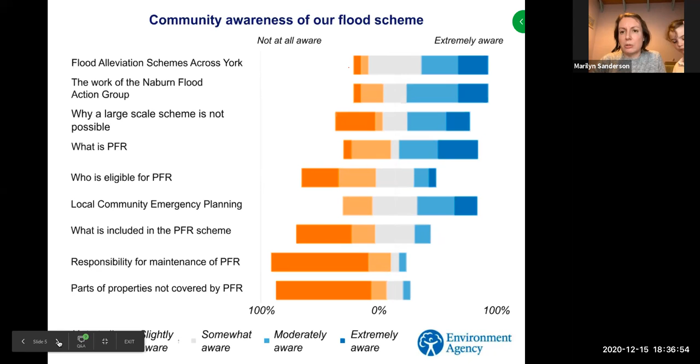so we're looking towards answering questions on PFR, what's included in the PFR scheme and what's not included, and then where the responsibility for maintenance of your measures lies once they have been installed. We've also got eligibility for PFR, so there are slides covering those questions. Obviously, any questions that you don't feel are being addressed, please just pop them into the Slido and we'll get to them as well. So our priorities, what you asked us to prioritise.

So top of the list there, we've got why Naburn is not getting a large scale scheme. And as I already mentioned, we're going to be going through some of the challenges that we've got in Naburn and why, unfortunately, we are unable to deliver a scheme here. The impact on roads and access, also of a high priority. And again, what is it that PFR can do for you. So like I say, we have got some slides on these, but anything you don't feel is being addressed, please just pop the questions in the Slido.

So straight into our process then. So I've summarised it here into the four key steps, which is simplifying it a little bit, but it's just to give a broad understanding. So it starts with the options appraisal reports. So there's been a series of these in Naburn. Pop to the next slide.

So the process of this, we have our specialists, so we employ contractors and it's AECOM who've designed these reports for us. And the purpose of the report is to give detailed assessment of the means by which floodwater enters properties. So is it coming from the river? Is it coming up through the drains? Is it coming from any tributaries that are going into the main river? And what options are best to try and manage those flood mechanisms. So a number of possible options are usually identified, covering a wide range of possible options, and these are shortlisted so we can appraise them further.

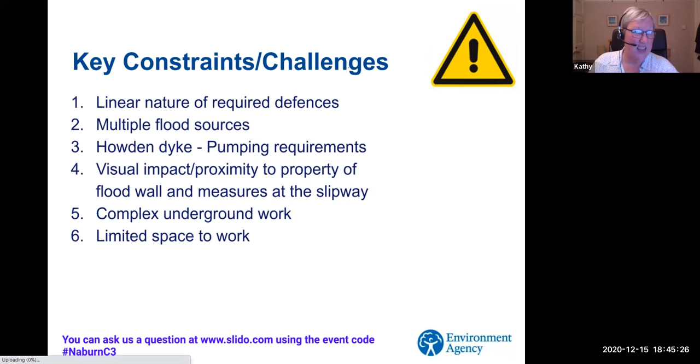You can get floodwater ending up being trapped behind a defence if the defence line has not been constructed and considered appropriately with the same level of defence across the whole length. Any chain, of course, is only as strong as its weakest link. So any options that we progress need to show that all significant flood sources are either dealt with by the scheme or can be mitigated by additional arrangements, for example, temporary pumping.

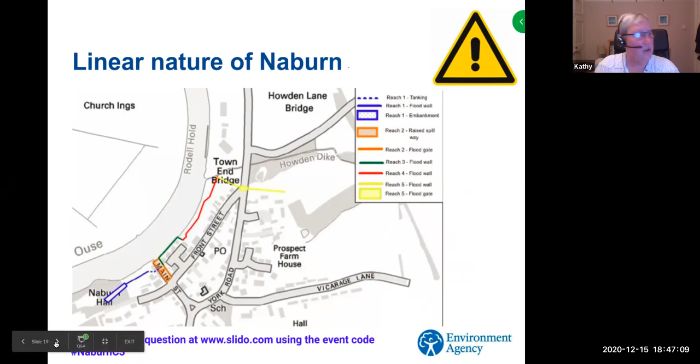Thank you. So looking at the various sources of flooding, as I mentioned before, any flood scheme must look to address all significant flooding. So in Naburn, as well as the primary challenge of the River Ouse itself, we have the route that the Ouse can take through Howden Dyke into the village. There is the flow in Howden Dyke itself, which needs to be addressed. The impact of any localised rainfall in the area on the local surface water system, and any field drainage which feeds into those systems as well from the areas to the east.

You will also notice that there is a significant area within the centre of the village where the low-lying nature of the land shows that there is an increased risk there of surface water getting onto the surface, settling and pooling. And I think anyone who lives in the village is quite familiar with that particular problem there.

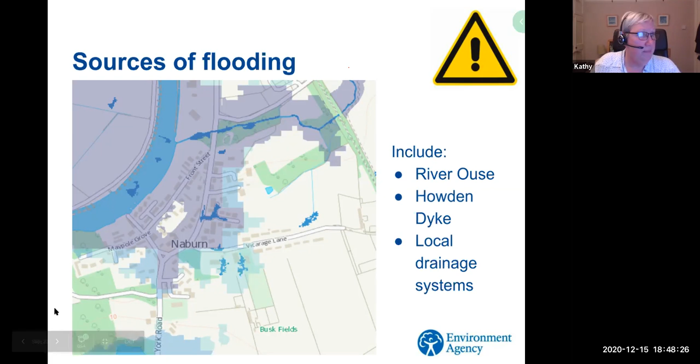So looking at Howden Dyke and the challenge that poses with regard to overpumping, permanent pumping arrangements are prohibitively expensive. Permanent pumping stations cost upwards of £1 million to put in place, and then have ongoing challenges with replacement, maintenance and operation, all of which have to be factored in to the whole of life costs of a scheme.

Temporary pumping arrangements are also expensive and resource intensive. And when we are in an emergency response mode in York, the provision of any pump cannot actually be assured at any time.

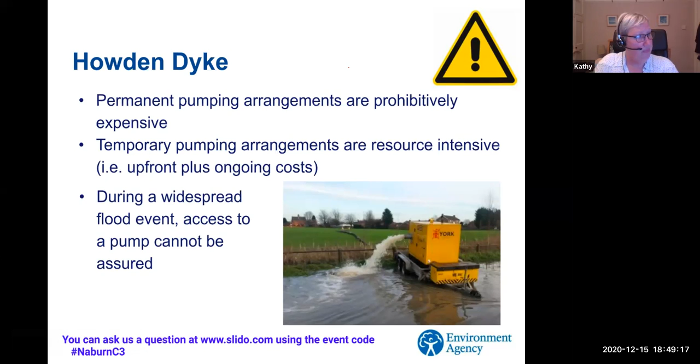So moving on to visual impact. This is something we do need to take into account, the impact on the natural and human environment of anything that we wish to see. In Naburn, the proximity of our interventions, our measures, our structures to the village itself, to individual private properties, and the challenge of those structures significantly changing the nature of the centre of the village, the views out onto the river, onto the washlands on the other side of the river - that risk is actually quite high.

So there's a risk of blocking access to the river for residents, as I think this drawing shows, which gives a potential impact in just one of the many reaches that we're considering - so the visual impact and the access impacts to the river for residents.

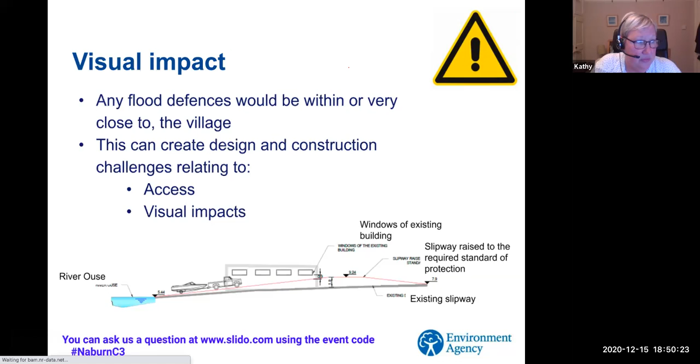So when river levels are up, water pressure obviously is increased, and that can cause seepage underneath the flood walls. So a little bit like an iceberg, any flood wall protection that you might see around York will have considerable work underground to ensure that seepage is cut off. These are most often provided by sheet piling, which is driven underneath flood walls, or sometimes we use grouting underground to cut off any seepage coming through, which would undermine the protection line, the defence line, if you like.

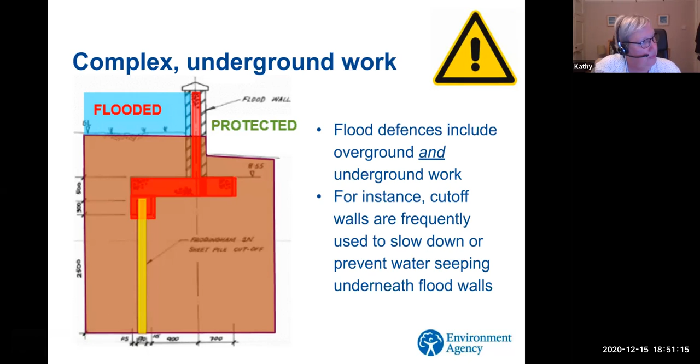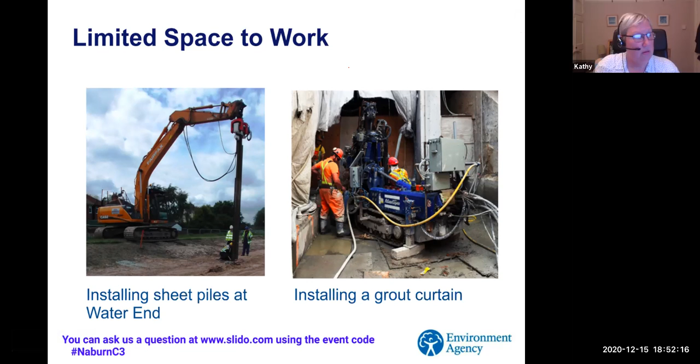Another challenge linked to that, but not exclusively to do with our underground working, is the limited space to work. In order to provide a traditional flood wall cut-off right at the river's edge, the size of the flood wall would have to be much higher than further away. But in either case, we would have limited working space, and it's most likely that for some of the reaches, that work would have to be done from the river itself. The costs and risk to the delivery of the project in the long run, because of the risk of flooding when you're working from the river, again all add to the cost side of the equation and undermine our ability to hit that magic cost-benefit ratio of 1.

We are obviously aware of the impact on access roads. However, government spending rules for flood risk schemes are very heavily weighted for the benefits of protecting homes against flooding, those damages avoided. So there are limited benefits available for protecting or improving access. It is quite challenging to justify schemes where the costs involved are really based mainly on improved access.

So having gone through those challenges that have been taken into account as part of the assessment process, despite our best efforts over a number of years, we have been unable to find a capital scheme that is affordable by some considerable margin. We are, however, committed to provide what flood protection we can to all those at risk, and therefore the solution for Naburn is the Property Flood Resilience Scheme. So I will hand back to Marilyn now, who will take you through what PFR, as the acronym is, can mean for Naburn.

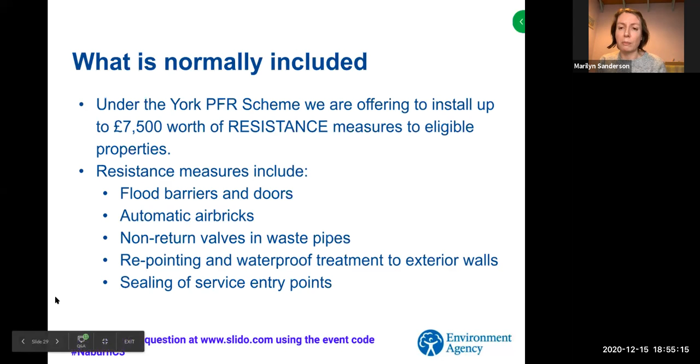In addition to these measures that stop water coming in, we do install pumps. From earlier pilot schemes across the UK, the PFR has found that installing a pump is the best way to manage and mitigate any seepage that can overcome the barriers and doors we've got, or any groundwater or subfloor flooding. There are two types of pumps: a puddle pump, which is a portable pump you would just put where it is needed, generally used for hard flooring such as concrete floors, or a permanently installed sump pump, which is for suspended timber flooring and goes in your subfloor void to pump out any groundwater or seepage that gets under the floor.

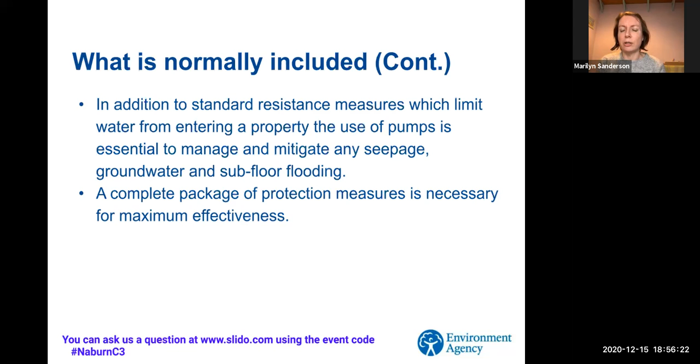A complete package of protection measures is necessary for maximum effectiveness. So we would be looking at the property as a whole and offering protection for the entire property, i.e. not leaving a gap or a route for water to be able to get in. So normally included, these are some of the examples.

So you've got a door in picture A and a barrier in picture B. So it's either or, although at least one entry point to your property must be protected by a barrier, so that if you are surrounded by floodwater, you are at least still able to get in and out without breaking that protection that you've got.

We've got the automatic air bricks, which look just like ordinary air bricks, but they've got the function inside to prevent floodwater from getting into your cavity walls. And then the black circle with the square next to it, so the pump, it's a sump pump. So essentially it's installed in a chamber in the subfloor void, and then there'll be an outlet pipe which will extract that water that gets in there.

And these can be internal if needs be, if that's the best place for them. Most likely and most popular is to put them outside your property with a pipe that goes into that subfloor, so it pumps the water out and then it's extracted away from your property.

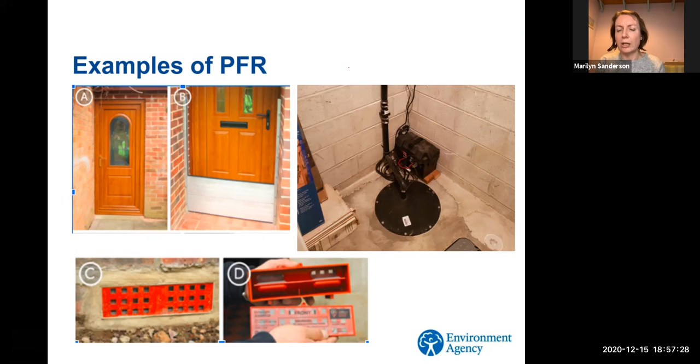What we're not including, or what is not normally included in PFR: gardens, garages, outbuildings are typically excluded from the scheme unless there is a direct flow route from that, for example, an adjoining garage. If there's no way of protecting the property without encompassing the garage itself, then we would look at best ways of doing that. But otherwise, the garage wouldn't ordinarily be eligible for measures.

Floodgates, again, because ordinarily floodgates are protecting gardens. They are not normally included unless there are extenuating circumstances or homeowners are wishing to pay for them themselves, essentially.

And resilience measures. So examples of resilience measures are where you could raise electrics or put hard flooring in. Concrete floors are more resilient to flooding than your timber flooring. These are not included in our scheme, and typically these sort of measures would be in excess of £30,000 per property. To enable us to protect as many properties as possible, our scheme is very limited to resistance only.

Eligibility then. So homes and businesses that are at risk of flooding from the main river. So in case of Naburn, the River Ouse, and in addition, any properties that have flooded in the past whilst the river was in flood. So this includes properties that were flooded potentially as a direct result of Howden Dyke, for example, or surface water being backed up because the river is in flood. So if you're flooded at the time when the river was in flood itself, then you're eligible for PFR.

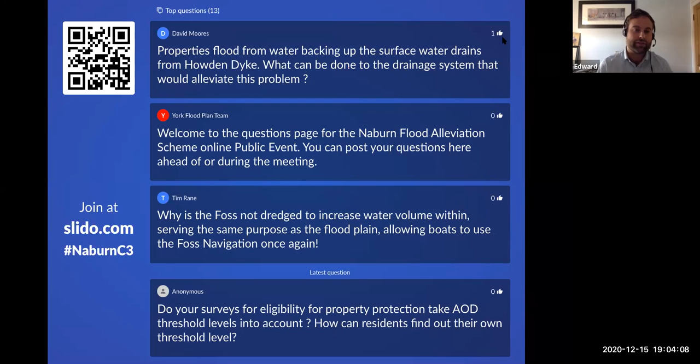So what we'll do, probably in the new year, given where we are in terms of December, is to provide a link to the event on YouTube, which you can share with anyone who wasn't able to attend. We will provide a summary of this event, a type up of the questions that have been asked, and also provide a more detailed document on the information on PFR. And if you have any questions that you don't feel are addressed here, and we appreciate there's a limit to how many words you can put in a question, feel free to email us at the York Flood Plan email account.

So to start off with, we have a question from John Stanley, which is, in 2000, just over 50 houses, or 1 in 3, were flooded. If the river flooded to the top of the design height of the defences, how many houses would be flooded? I'm going to direct that to Kathy, please.

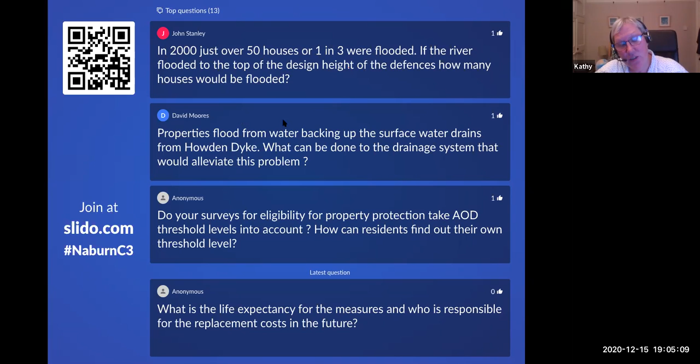Hi, thank you, Ed. So the flood height in 2000 was about 8.8, 8.9 metres AOD. So if we were looking to design to the 1 in 100, which is the level we designed to, we were trying to develop a scheme for a minimum of a 9 metre height. That would indicate closer to 60 properties flooded. So that would be the increase. Obviously, overtopping or failure of a flood defence brings with it its own challenges as well. But I think those are the figures. I can double check those and confirm those though, if you want, after the event. Thanks very much, Kathy.

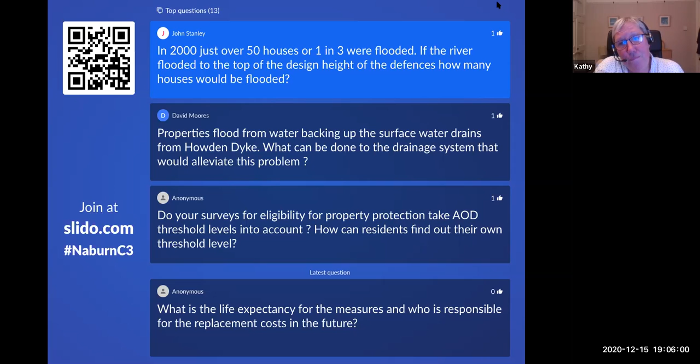Now I'll just tick that. This is kind of a live question and a question sheet, so sometimes things can move around. So if for whatever reason I suddenly miss something, or don't stick to my golden rules, then please have patience. But we'll try and track it as best as possible.

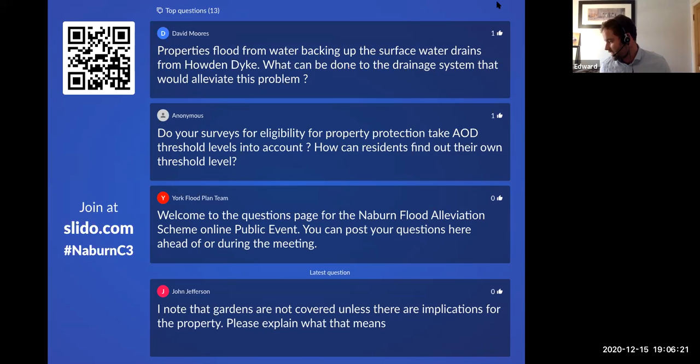The next question is from David Moores. Just highlight that. So properties flood from water backing up through the surface water drains from Howden Dyke. What can be done to the drainage system that would alleviate this problem? I'm going to direct this question to Steve Raggett, City of York Council.

Thanks, Edward. Yes, I've spoken to Laurie Gunson from the flood group on this, and it's something that we've committed to take forward separately to the discussions that are happening here today and as the wider flood scheme. There has been some work done before in Palms Court and Close, in the past. And we are dependent on the capacity and the operation of the Yorkshire Water Pumping Station as well. Where possible, we will look for localised solutions and work with the flood group in trying to take those forward.

But I think, as Kathy outlined in her presentation, it's the interaction with the Ouse as significant input into the Howden Dyke network that really backs the surface water system up in terms of flooding. And without an exclusion of the Ouse waters from the surface water system in and around Howden Dyke and other parts of this village, it's very difficult to get a holistic scheme together to actually prevent some of these things happening. But we will work with the flood group and look for any localised solutions that could be effective. Thanks very much, Steve.

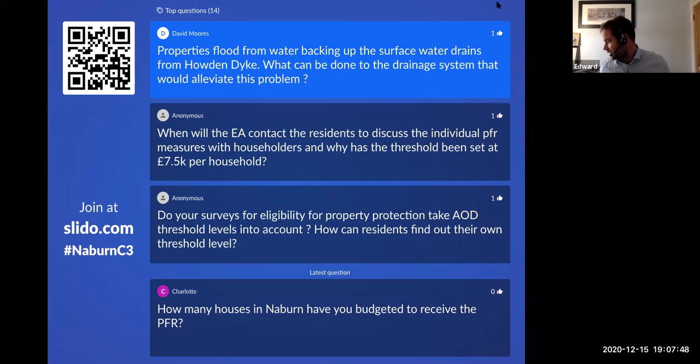The next question is anonymous, and it says, when will the EA contact the residents to discuss the individual PFR measures with householders, and why has the threshold been set at 7,500 per household? And I'll direct that question to Marilyn, please. Hi, thanks, Ed. So 7,500 is the allocation that we've got for York, which is actually better than in other areas across the UK. And part of that is from the funding that we received in 2015 and how we were able to provide that little bit extra funding for properties in York.

So contact residents to discuss individual measures. Once you've had your survey, we will be inviting you to discuss with ourselves the content of that survey, and we will be able to see what options there are that you can have choice over. So some things come in different colours, or like say with the doors and the barriers, you can opt to have doors as long as you've got a barrier, but the way you put that barrier is your choice. You can have it at the front or the back, or whichever door is best suited. So we will be inviting you to have those discussions with ourselves, with our contractors, once those surveys have been completed. Thank you very much, Marilyn.

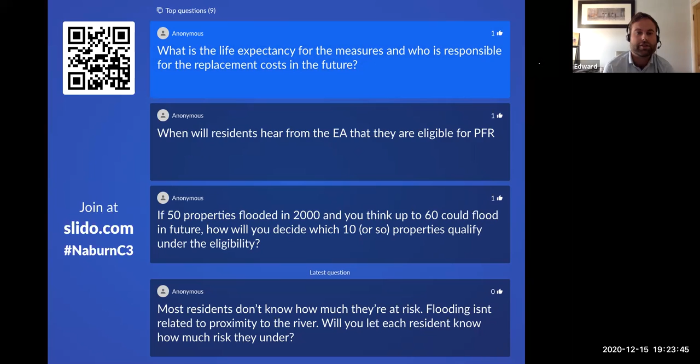Next question is, what is the life expectancy for the measures and who is responsible for the replacement costs in the future? I assume this is referring to PFR measures, so I'll direct this question to Marilyn, please. Super, thanks. So some of the measures, depending on how frequently they've got floodwater in them, may need replacing more often than others. Often it's certain elements of them. For example, the first thing typically to go would be the rubber seals. So if they have been subject to multiple floodings, you might have to replace the seals more often.

Typically, for your barriers, your doors, normally they're given 10 to 15 years. However, the better they're looked after, the more maintenance they get, the longer they're likely to still give you that level of protection. And responsibility for that is the homeowner. Most of the measures will have a 12-month manufacturer's warranty.

But once that warranty has expired, then the cost of any replacements or maintenance comes down to the homeowner. Great, many thanks, Marilyn. I have another question lined up for you, which is from Anonymous. When will residents hear from the EA that they are eligible for PFR?

So we're currently getting contractors in place to carry out the surveys, and then obviously the installation works within Naburn. We're anticipating to get everything lined up in the new year, and we're hopeful to be able to get surveys done spring next year. Now, we will be getting in touch with you prior to that with our questionnaires. So we'll be sending those out again early in the next year. We'll be sending the questionnaires to yourselves so you can start thinking about what your flood mechanisms are.

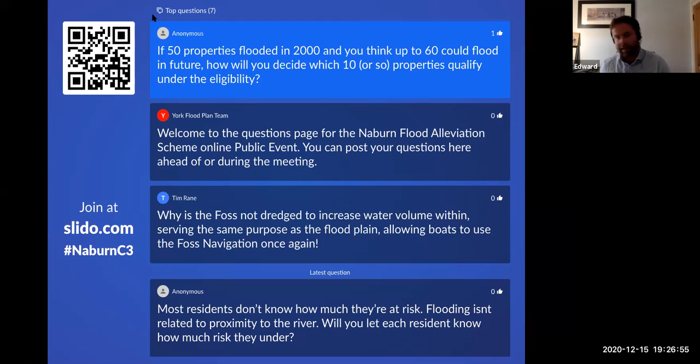Next question. I'm just going to delete this one. It was something that we set up just to help get people in the mood for submitting questions. I'll just take that York flood plan one.

Next question is from Tim Rane. Why is the Foss not dredged to increase water volume within, serving the same purpose as the floodplain, allowing boats to use the Foss navigation once again? What we'd say is that a question regarding dredging is important but not necessarily relevant to this presentation. So in the case of Tim Rane, we have had some correspondence on this separately, but if anyone has any other questions, that's something that we're happy to have a discussion about separate to this meeting. So just to tick that one off.

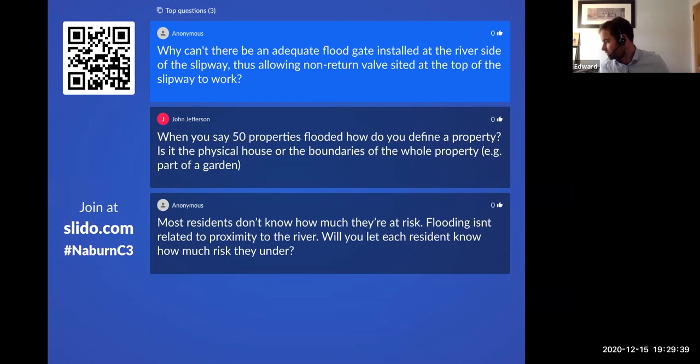Next question is from John Jefferson. When you say 50 properties flooded, how do you define a property? Is it the physical house or the boundaries of the whole property? For example, part of a garden. If I could send that back to you, Kathy, please.

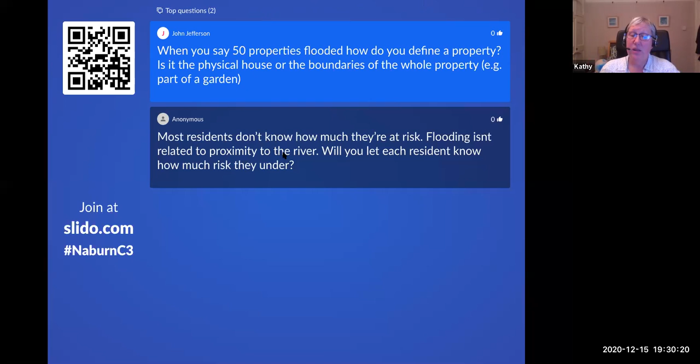It is the physical building, the home. So when we talk about a residential property, it is the physical building. We have MasterMap, it's called, which is a layer which gives us the outline of each building. And if a flood outline cuts through that, the property is said to flood. If it cuts through the garden but doesn't touch the building, it is not counted as a flooded property in that respect. Many thanks, Kathy.

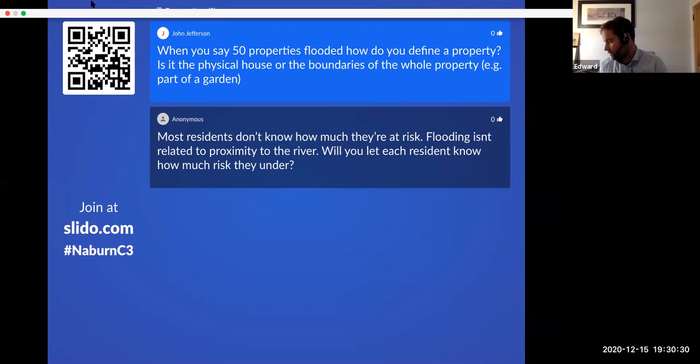And a final question from Anonymous. Most residents don't know how much they are at risk. Flooding isn't related to proximity to the river. Will you let each resident know how much risk they are under? I will direct that question to Marilyn, please, but allow for anyone else to add to that afterwards.

So we'll be getting in touch with those residents that are eligible for PFR. For anybody else, if you want to know what your flood risk is, then there is the government website, which, if I can ask Emily to put the address to it in the chat function, it's 'What is my flood risk', which you can put your postcode in and that'll give you what flood risk your property is at. And you're right, it's not just about proximity to the river, because it'll give you flood risk from surface water, from coastal, obviously not relevant for Naburn, but if you've got properties elsewhere, you might want to put postcodes in.

Many thanks. And the final question is, if none of the PFR measures available through the scheme resolve and or reduce the flood impact to a property, what other options are available? And if I could direct that back to you, please, Marilyn.

Please write again if I'm not answering your question, because I'm reading this as: if what we can provide you isn't relevant in terms of the resistance measures, then there are other things you can do within a property, which are the resilience, so the more expensive, more intrusive options. However, if you are at flood risk and the resistance measures don't provide enough protection, then we would recommend that the resilience route is something that you look to go down.